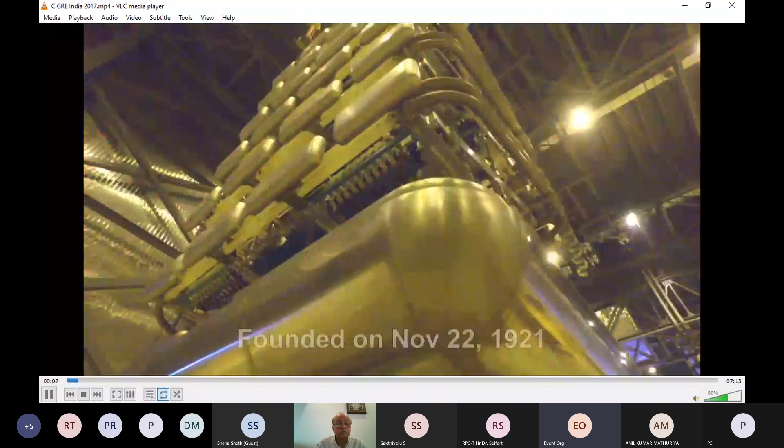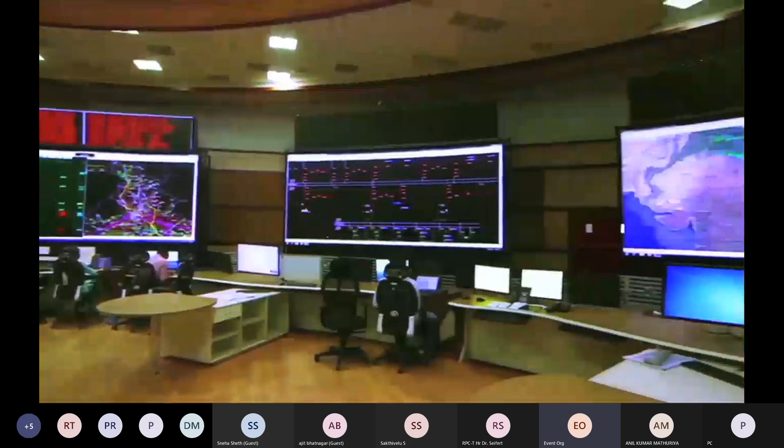CIGRE, the International Council on Large Electrical Systems, is the world forum for power systems, founded on November 22, 1921 at Paris. CIGRE deals with the issues related to the development, operation and management of electric power systems as well as design, construction, and maintenance of equipment and plants. Mission of CIGRE: to bring together experts from all around the world by sharing knowledge and joining forces to improve the electric power systems of today and tomorrow.

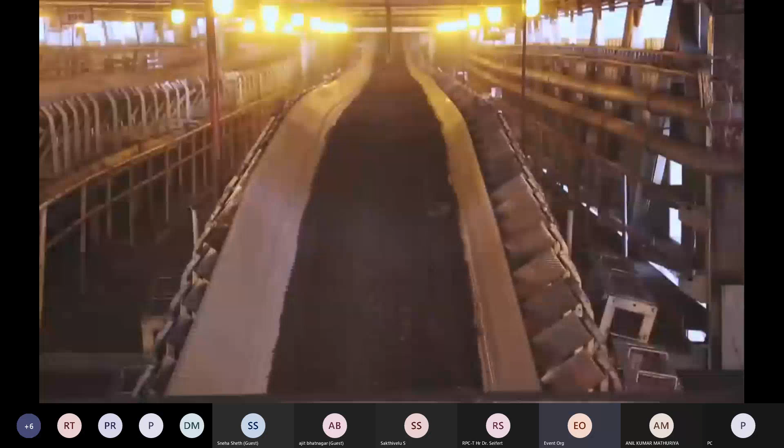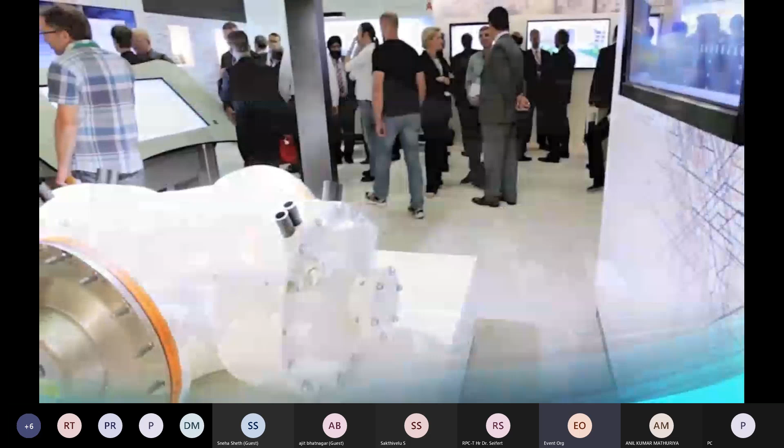It mainly aims at coordination of research, exchange of experience, and scientific and technical information on the operation and design of electric power systems. CIGRE is an association that promotes the exchange of the latest generation of technical knowledge and brings innovative ideas to support industry needs. CIGRE has a worldwide network of experts from ministries, generating companies, transmission and system operators, distribution operators, regulators, manufacturers and academia. It has gained international representation in nearly 90 countries through national committees in order to provide opportunities for improvement of services supplied to society.

CIGRE has 16 study committees, 95 member countries, more than 10,000 individual members and more than 1,000 organizational members. CIGRE's strategic directions are best use of existing systems, unbiased information for all stakeholders, environment and sustainability, and future power systems. The challenges are renewable energy sources, growing environmental requirements, limitations to build new transmission infrastructures, architecture of networks, operation of existing power systems, transmission of large amounts of power over long distances, cybersecurity, and intermittency of renewable power generation.

CIGRE operates through 16 committees on different subjects having members from various countries. These committees are divided into 4 groups. Group A, Equipment, and the study committees are A1, Rotating electrical machines, A2, Transformers, A3, High voltage equipment. Group B, Technologies, and the study committees are B1, Insulated cables, B2, Overhead lines, B3, Substations, B4, HVDC and power electronics, B5, Protection and automation.

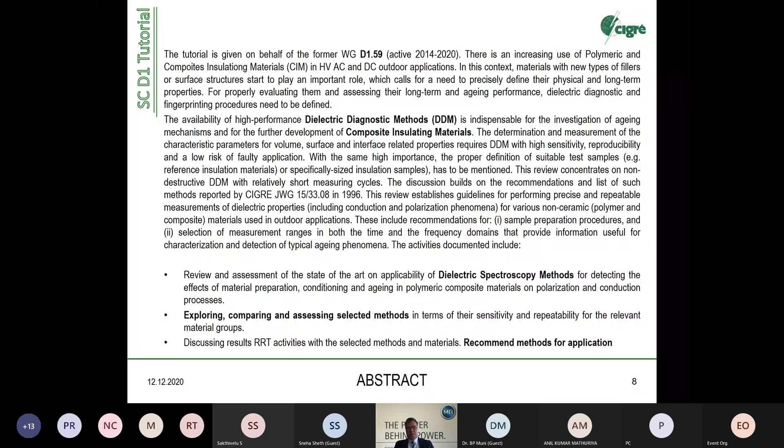So we will talk about composite insulating materials. Composite insulating materials are today considered an emerging technology. If you look into cable insulation, composite insulators, dry-type transformers, all these oil-free, SF6-free apparatus work with these composite insulating materials. And the uncertainties are here.

That's one of the main troublespots in composite insulating materials, which are interfaces. Interfaces you can have as a macroscopic interface between silicone and epoxy, or between metal and the composite material, or you can also have microscopic interfaces. Microscopic interfaces are interfaces between a matrix system and a filler, for example, a quartz powder, alumina, or glass fibers. And interfaces may be very complex.

So these are the standard ones taken for theoretical investigations. Typically you can have a normal interface or a normal directed interface. You can have a tangentially directed interface, or a mixture of both. When you think about glass fiber reinforced polymers or mineral filled polymers, you have a very diverse, wide, and complex arrangement of interfaces. But to understand which kind of interface is dominating, these three models - normal, tangential, and normal-tangential - are defined.

Going back to the actual polarization effects in solid dielectrics, this is taken from a book, from lectures of professors, of course - it's not a new invention. What we have to look at today is time starting from some microseconds to hours, months, and years. And the polarization mechanisms behind are mainly driven by space charge polarization, so ionic polarization, hopping polarization, and orientational polarization - so dipoles. That's the range we are looking into the physics when we talk about composite insulating materials.

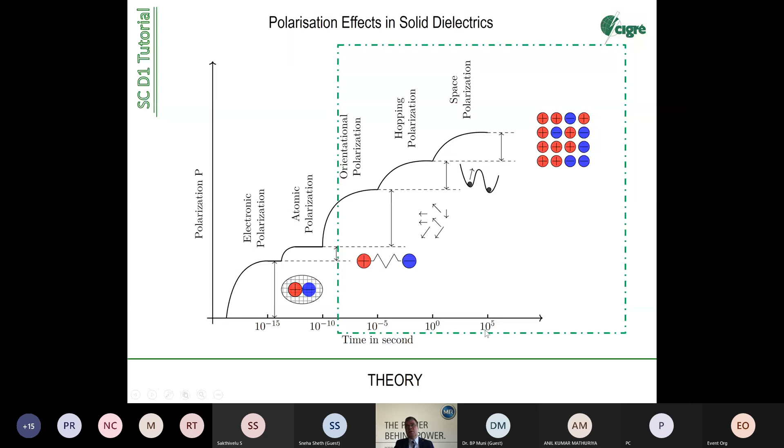For example, in this range - space charge and ionic polarization - we mainly talk about the Maxwell-Wagner effect. Maxwell-Wagner effect is a dominating effect in composite insulating materials since it acts at interfaces. So you charge or discharge space charges or ionic particles in and along interfaces. So the Maxwell-Wagner and so-called accumulator effects are the main effects we have to look into. And what we also can see here, we have to look at long times. Long times means low frequencies.

So after reviewing the available procedures and methods, we found very nice methods coming mostly from universities and from scientists, which are called time domain spectroscopy, TDS. It's a very interesting way to analyze materials. It's given here on the left side as a very simple scheme.

So you have a stimulation - normally a step voltage - and the step voltage has a response which is called current response, and this current response is given by the quality and nature of the dielectric. So normally what you do, here's the theory behind it.

So you have a polarization contribution, you have a conductive contribution - here's the polarization, here's the conduction. So normally you use a kind of Laplace or Fourier transformation, DFT, to transform this response function into a spectrum, into a frequency spectrum, and from this frequency spectrum you can see what kind of effect is in the material.

It's most probably the most effective method because it's not time consuming, it's easy to apply. What are the difficulties? Difficulties are measuring the very low currents. The currents are in the range starting from nanoamperes via picoamperes and femtoamperes. So the main challenge here is to have a noise-free, distortion-free measurement of such low currents.

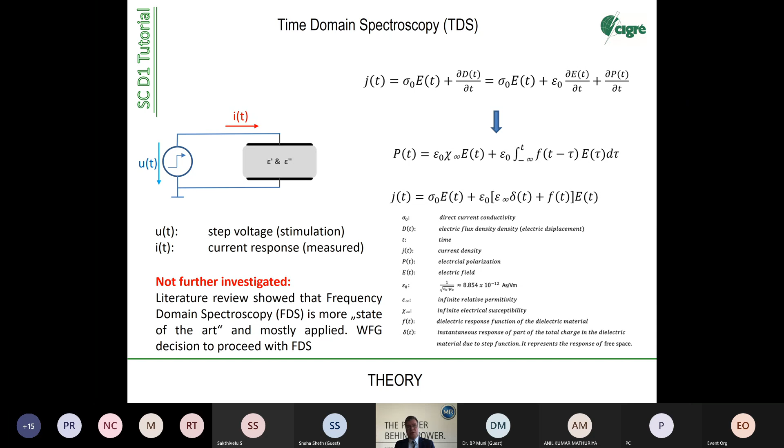This is possible in shielded arrangements, but we found it's not so good in industrial applications because the required conditions are hard to realize. It's an interesting method - you find a lot of papers in the literature review, and it's also used in transformer diagnostics, by the way. It's very close to applications, but for materials, we selected this method here.

It's a frequency domain spectroscopy, also called FDS. In FDS, you take a voltage phasor as a stimulation signal, and you get a current phasor as a measuring signal, as a response. This is a very simple arrangement. You vary the frequency normally, starting at very low frequencies in the range of some millihertz, then sweeping into the kilohertz and megahertz range, and you get this current response function, which is also divided into a capacitive part.

Let's see, a response given by the permittivity, and also a contribution given by the conductivity. So both methods consider conduction effects and polarization effects. And from this calculation, you can derive the complex permittivity, which is epsilon 0 multiplied by epsilon R1 and epsilon R2, the complex function. And in the complex function, you can distinguish between polarization and the conduction part. The conduction part is given here. Both are depending on frequency.

And so derives the tangent delta. Tangent delta is also known as loss factor. And the loss factor can also be split off in the polarization part, so it's the dipoles where you lose energy by friction, and you have also a loss by conductive mechanism. So it's a very clear and comprehensive theory behind, and it's just about the evaluation of the complex permittivity.

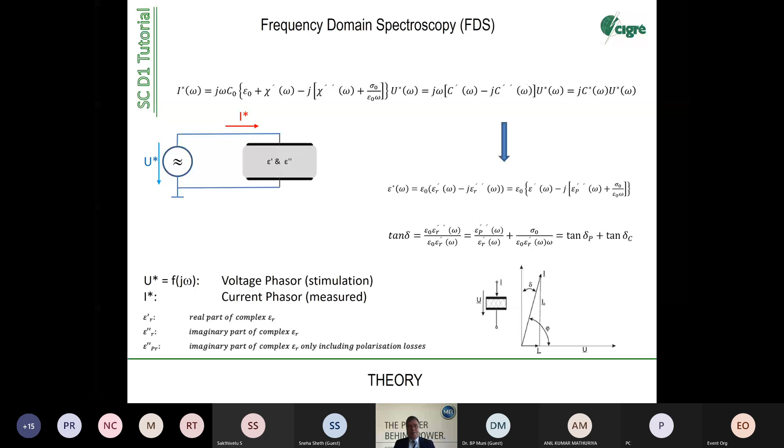So what can we do with the results? This is mainly from a very good book made by Jonscher in the UK, from Chelsea Dielectrics Group, a dielectric study group that worked in the 1970s, 1980s, which derived a lot of physical mechanisms that can happen in moisture affected or aging affected polymers and composite materials. And this is a summary of what is written in this book.

So it's a list of typical dielectric phenomena in solid dielectrics. We start with the simple ones. You know the Debye relaxation, which takes place in the high frequency range. Here's a kind of non-Debye, a mixture of many mechanisms taking part in the multi-100 megahertz area. As I mentioned before, resonances are also in the optical range. They are not important for us.

So we have to look at 4, 5, 6, 7. Number 4 is interfacial polarization taking place in the low frequency range. This is the Maxwell-Wagner effect. So this half circle or semicircle in the low frequency range is the Maxwell-Wagner effect. Number 5 is ionic conduction, which is theoretically a straight line in this diagram. This is also called a Cole-Cole plot, epsilon 2 versus epsilon 1.

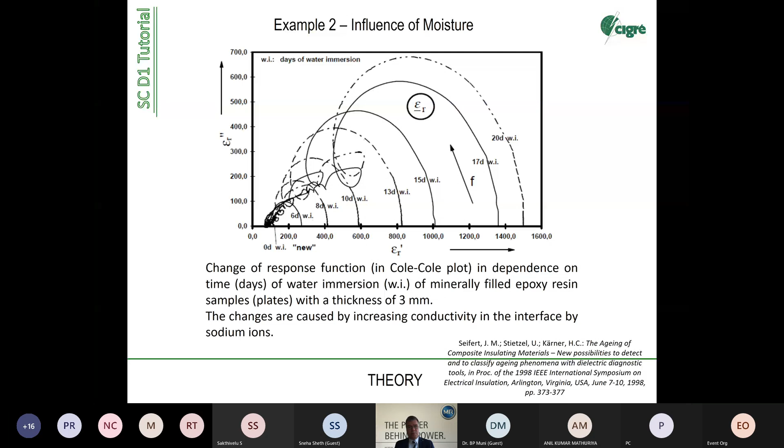And in the brochure, you have two sets of references. One is the normal one, starting from 1 to the end, and there's the E1 to E33 or 38. And the E references are for examples. So don't be confused if you read the technical brochure. This was done by intention to distinguish examples from the main literature.

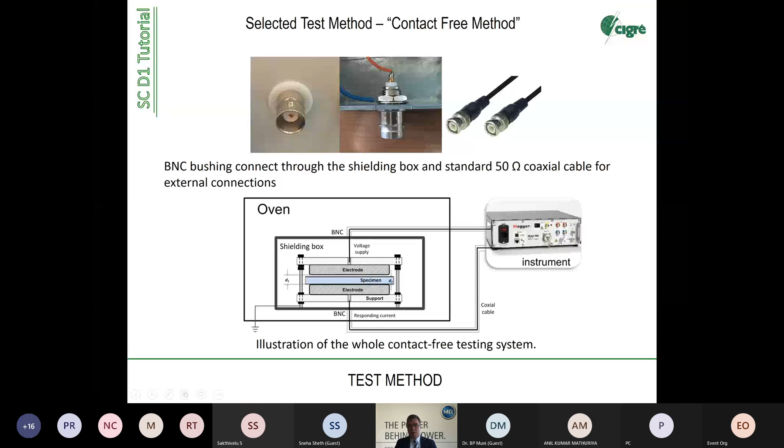Sensitivity analysis, and this was really thanks to Professor Derek Oliver from the University of Manitoba in Canada, who is one of the best experts, in my opinion, in this field. He did very theoretical work, but also assisted and supported by experimental work in the background, and he found that the spatial geometry, which is given with the delta dr, also has an impact on the accuracy of the correction factor. So if you do not do it in the right way from the beginning, and the arrangement is not fixed as it should be, then other factors are also negatively affected. It's like a chain reaction. If you do the first step wrong, then your other steps are also not very good.

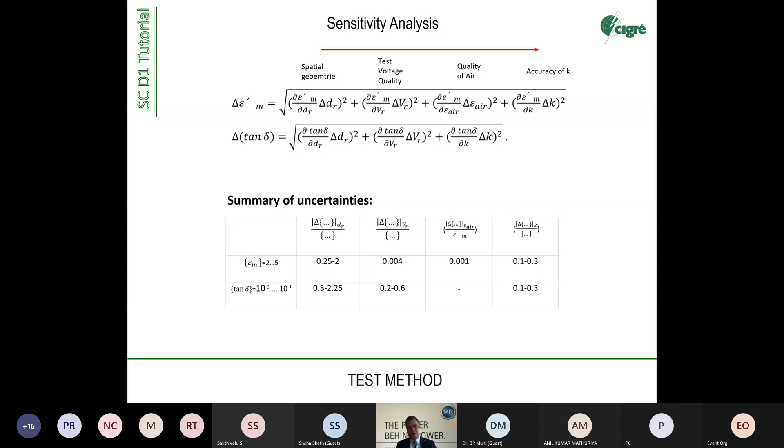I think for later practical applications, you will not measure 5 cable slides or 5 cable samples because you cannot afford to do it, or you don't have the time or the resources. So this is one thing we have to look at, and we have also recorded it in the lessons learned.

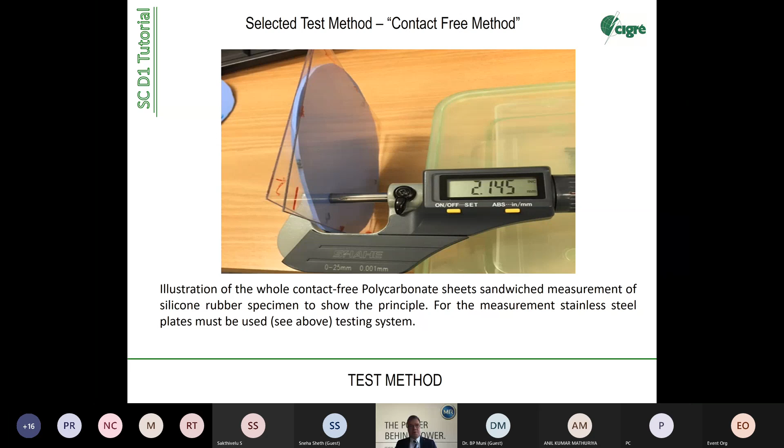Now the theoretical part is more or less finished, so now it comes to the test procedure. In the work on fingerprinting and in the tracking and erosion experiments we did in D127, it was found that we should have a really good test specification.

With the test specification and the quality of the test specification, people start to work. For example, in this working group we had 7 participants sitting in different continents. One lab is in Canada, 2 were in Germany, 1 in China, 1 in Sweden, 1 in Argentina. So you're working not in one group, but under different conditions. The temperature in Canada may differ from the one in China, or humidity conditions may differ.

This is intended. Exactly what we want to do is apply this method, or explore this method, under different conditions, done by different workers, under different control conditions. This is why we do this, because we have to develop a method that is at the end representative, repeatable, and cost affordable. We have to apply this method in an industrial way at any site we can imagine in the world where we want to get this value. This is one of the rules, the 4 rules of IEC. If they are not fulfilled, such a method will not enter the world of IEC standards.

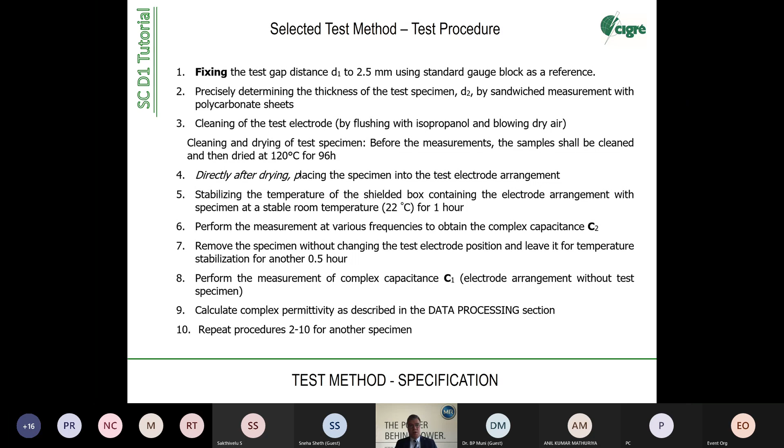Some key hints here. Do not move or adjust the electrode system after the reference measurement. For an expert it's clear, but the lessons learned were different. Fix the gap distance to 2.5 millimeters. Use a shielding box to avoid external interferences. Connect via BNC. Do not use oversized specimens.

Sometimes you say, okay, my measuring area is 100 millimeter diameter, so take a big plate and put it under the electrode. Don't do it, because it affects the factor K due to the stray field.

Determine precisely the average thickness of the specimen as well as the air gap. As I mentioned before, these are the main error modes or error contributors. Clean the specimen. Always check original capacitance data, so there's self-verification of the equipment, the self-testing you have to do.

Sometimes these electronic devices are not in a zero status. Secure proper grounding of the measurement equipment. Avoid loose contacts, because these are also potential failures.

You can maintain stable environmental conditions regarding temperature and mainly humidity during the test. Store the samples afterwards in a dry area, maybe in an oven, if you want to repeat the measurements, or if it's planned in the round robin, just to repeat it after some days.

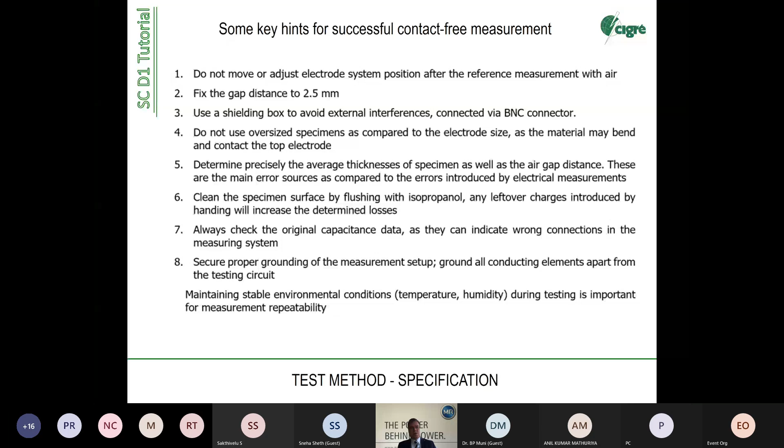Actually, this was our main scope, to work with this kind of characterization of new materials. But then we decided, by the way, we had 14 working group meetings, two per year, and the last ones were virtual. But you can imagine that if a large group of 30 people or even more sits together, there are a lot of ideas coming up, and some of these ideas are good. Sometimes we followed them up, sometimes we forgot about them, but here was a good one.

It's water immersion, because, as I mentioned before, the interfaces, the microscopic interfaces in composite insulating materials, are mainly affected by moisture. So we can trigger potential aging mechanisms with moisture. We can stress the material in an easy way, and most probably this is also the dominating aging effect that we see in real application in the field.

So we defined a procedure. What is water immersion? We dried the samples first at 120 degrees for 96 hours. With contact-free measurements, we want to measure. We use distilled or deionized water and place the test object in water for 50 days at room temperature. You can even promote the aging if you increase the temperature.

There's a rule: if you increase the temperature by 10 Kelvin, according to Arrhenius, you get double the process behind it. So if you have a diffusion effect or diffusion mechanism depending on this equation, by increasing 10 Kelvin, you double the speed of diffusion of water into the material. So you can imagine, and there's also some limit.

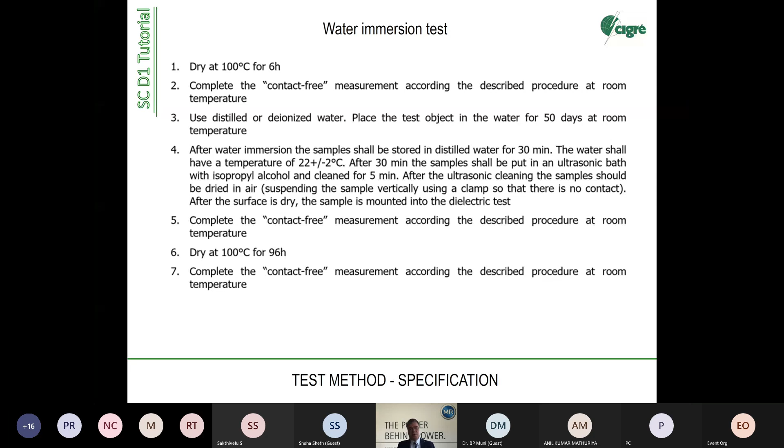Most of the people are not attending today, but these were the real workers. If you perform a round-robin test, you have to have somebody who spends the time and the money. In most cases, these were universities: University of Manitoba in Winnipeg, Canada; Chalmers University in Sweden, with Professor Gubanski, a great expert in dielectric phenomena; and Professor Kornhuber, together with Professor Bersch from Zittau, who are also deep in the field of dielectric materials and testing.

German Salvo from Argentina, from Edenor, whose company works in diagnosis of equipment mainly, also in other materials. You see the Technical University of Munich, Professor Kindersberger and his team. He's also retired now; at that time he was chairman of SC D1 and main initiator of this work.

Not everybody tested the same materials, but most tested HTV rubber, a commercial grade silicon rubber used mainly in composite insulators and cable terminations. Liquid silicon rubber covers a similar application range, going deep into cable systems. EPDM from cables and also from former insulators used as housing materials. Epoxy resins, a wide group of materials applied in medium and high voltage equipment, for internal insulation. Most of these epoxy resins are filled with a mineral filler, quartz powder, to set up the desired conditions. So this was the round-robin test.

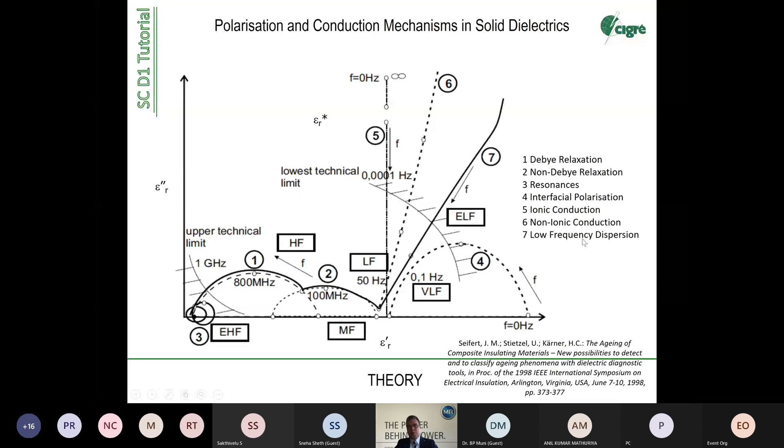So what you see in this curve is coming from here, from the lowest technical limit down to 50 Hertz or even a little bit more. So we go into kilohertz or megahertz area, but we are somewhere here in this falling branch of the so-called low frequency dispersion curve. I go back to the other one. So just to give you orientation where we are. So it fits with the theory, and we are looking to the right signal, so to the right range. Because we are searching for interfaces, we are searching for ions, for molecules that are moving, for slow moving effects.

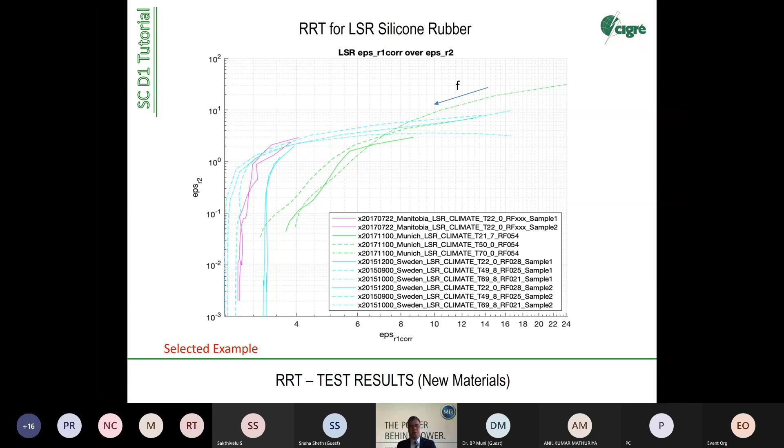So it's a pure material, more or less pure material with low amount of interfaces, actually theoretically with no internal interfaces, but also they use some kind of silica to get a mechanical property. So also these materials have some kind of interfaces, but a low amount. This material here has, by material formulation, a higher amount of internal interfaces, just given by the filler loading, which may be between 50 and 60%. 50% of the elastomer is mineral filler. You can imagine how many interfaces you have between the fillers and the polymer when you think about that these particles are in the range of 10 to 20 micrometers. So these are areas of, I think, some soccer fields that you get in a small sample.

Here, very promising at 50 Hertz, very small scatter, also with the air reference method. And in the low frequency range, you see a little bit higher scatter. But tendency is very clear here, with lower scatter than with the LSR. Why? We think, or we concluded that the interfaces give a clear signal, give a clear process behind the response, and that when this happens, then you really measure something that is really going on. So it's not determined by scatter, it's more determined by a real physical process. Same here. It's the loss part, the imaginary part, the falling tendency. It fits perfectly with the

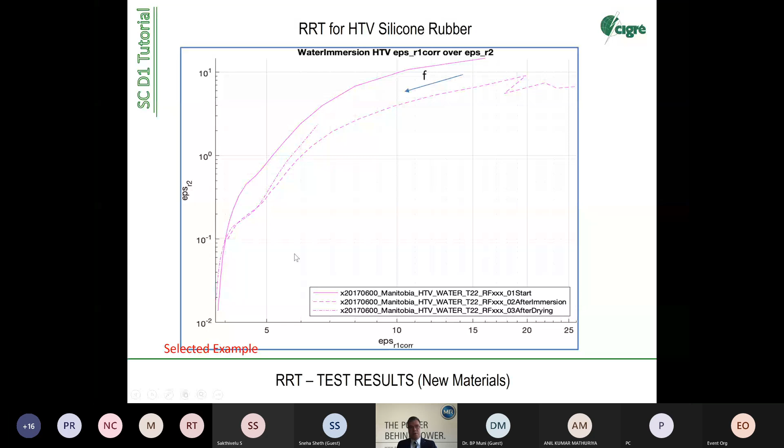Alumina hydroxide is a polar filler. It means by its nature it has a kind of polarization, and of course you have the contribution to the interfaces. Also, alumina hydroxide is not only alumina hydroxide, it contains a lot of water by nature, not only from water immersion or water penetration from outside, but if you manufacture this material, you have a certain amount of bonded water inside.

This is by intention because this filler is used as a fire extinguisher or to set up the tracking and erosion performance. Tracking and erosion performance is actually like extinguishing fire, extinguishing the arc. So you're using the same philosophy to get good tracking and erosion resistance as making a material non-inflammable.

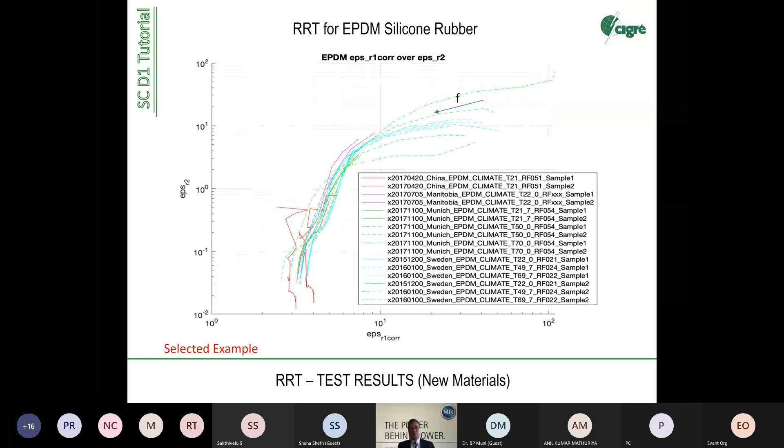Mineral filled epoxy resin, that's what I showed you before, these pictures here. These were the same kinds of materials. So you see one material, because of the interfaces, may be susceptible to electrical overstress. And electrical overstress means treeing, means step-by-step carbonization and growth of channels that may lead to failure after time, so aging time.

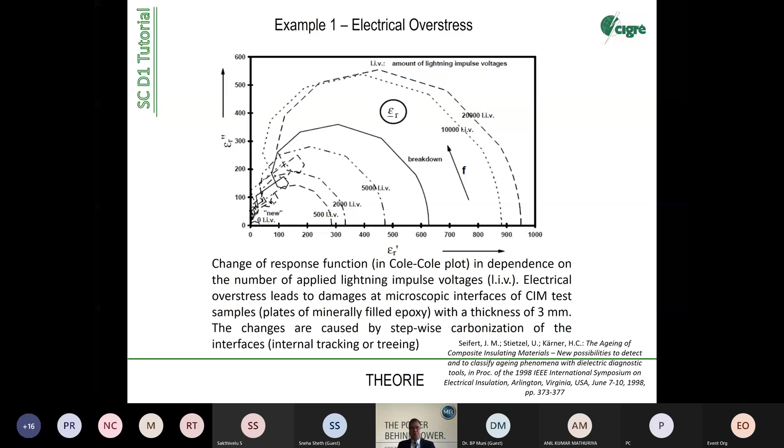This relates also to the inverse power law. You can load the material and it will not show any kind of aging until you exceed the so-called damage limit. Damage limit theory also applies for materials. If you always stay underneath the damage limit, so the voltage stress or the water stress is lower than the damage limit, you don't see any aging. Same here, that's the curve we have to look at, and the round-robin test.

Potassium is not so critical because it's not fast moving, but the speed of ions is higher with sodium. So you have to take care that your fillers have low sodium content. Secondly, the fillers must be treated with silane at the surface. Silanization and alkaline content make a good filler for a good composite material. The same applies for glass fiber reinforced materials, and for all kinds of mineral filled materials. It's also a lesson learned here, so the quality of materials can be checked with these methods in a very good way.

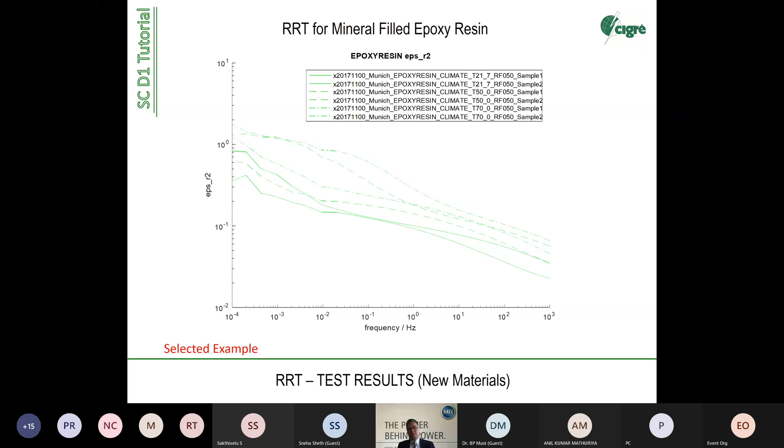The imaginary part also in a low range with a relatively flat response compared to the others speaks for the same feature, good quality material. You see again the Arrhenius characteristic when the temperature is changed. But you still see a response, you still see the Maxwell-Wagner effect is active. This can also be confirmed here.

But with all the data, what do you do at the end? You need not an expert to look into such diagrams and decide whether it's good or bad or what you see from it. In the theory for later applications, we have to bring this to a figure, to a quantitative figure, so that we can say okay, here we see a kind of effect, or we see this kind of effect, or we see no effect.

For this reason, we applied the theory of low frequency dispersion. Why low frequency? Because in the low frequency range we see the Maxwell-Wagner effect. We see all effects that are interesting and important for composite insulating materials. Why this kind of dispersion, why don't we use Maxwell-Wagner? Because Maxwell-Wagner is not sufficient to describe what's really going on in the material.

So we selected a model from Jonscher, number 13. Very good to read if somebody has an interest to go deeper into this very interesting field of physics. Read this book and you will find a lot of URLs inside.

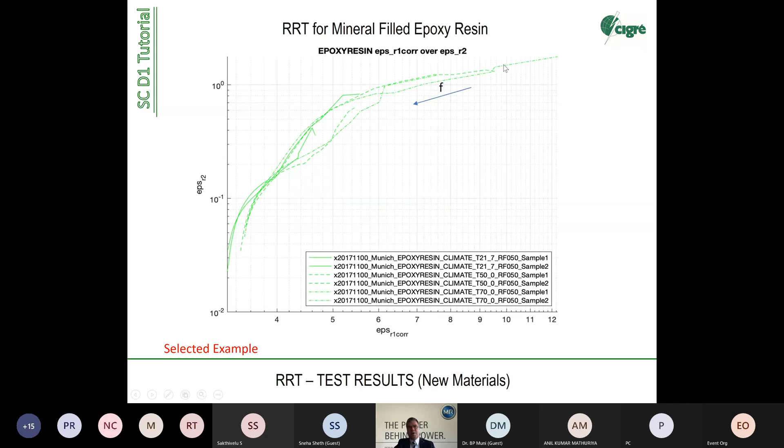And this N you have to see. N is actually, you have to make a straight line here, extrapolation. Also, your software is doing this, so you have to determine the angle of the slope, and from this angle, from this arctangent, you determine n from these values in the logarithmic figure. Stefan has done this by means of self-made computer software in order to have all diagrams under the same observation and under the same evaluation.

And in literature, you find the following values. So normally I explain how you do it. You take this slope. From the slope, you get the angle. From the angle, with the cosine function, you get n. With N, you can look into Jonscher's theory. For example, if you see an N of 0.8, you have a dipolar response. If you see two modes, like here, then we have a dipolar response, and the lower one is a conductive response. So it's a mixture of two. So you can filter out different modes of polarization and conduction.

This is also lessons learned. So we need a software like an expert system to detect what's in your materials. That's for the next group, for the continuation of this work. We need an automatic device that gets these N values out of the plot. And this is also given to the big suppliers of equipment like Megger, or I don't know what the names are. They are the companies that supply such test equipment. They could have a software enhancement to get a module for dielectric diagnostics. This is very important for later studies on real applications, because you cannot hire a scientist any time in a utility when you want to do a cable diagnostic or transformer diagnostic. So you need equipment that has already implemented this kind of evaluation.

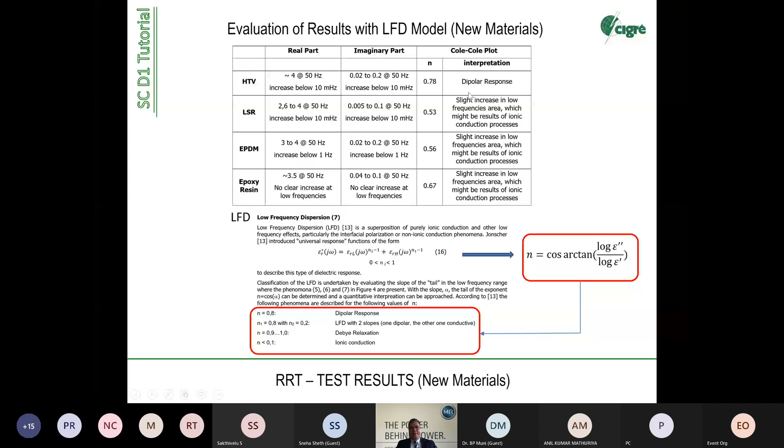Of course, this is for new materials. The whole thing becomes more interesting when you do water immersion or other aging effects. This is a test that was done additionally. It was not in the plan, but we said, okay, we want to simulate aging. We want to challenge the material, to stress the material, and we selected water immersion as an aging mechanism for this group of materials. So you see here we go into the details. For these epoxy resins, by intention, we used a bad filler. It's a bisphenol A based epoxy, the state of the art, but we used a filler that is not surface treated.

And we used in this case as a reference a good material with a good filler, with epoxy silane treat. And FRP material we used as also to look into it. Specification for water immersion, I repeat it again. We have to define the way we want to store. We want to have the initial conditions. So what do we do before the storing, and how do we handle it during the procedure?

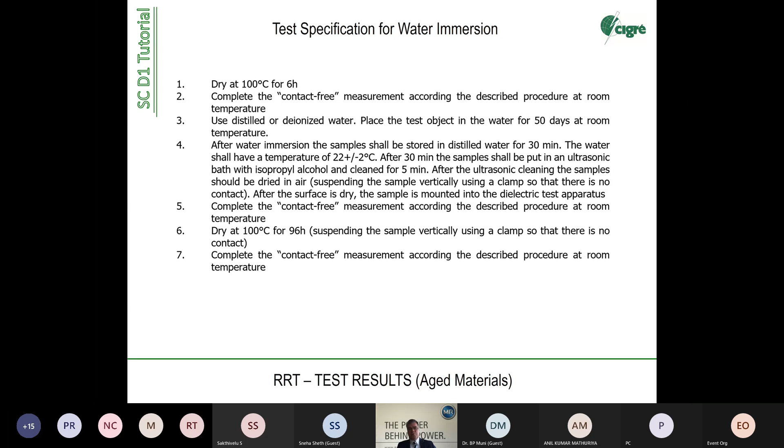So we are not fully at the target. So we need to do more. So the group needs to do more. In my opinion, it's easier to work on an application because your capacity and the material input is much higher. So the likelihood to have a disturbance on a bigger volume is lower than disturbing a small test sample. It's only my idea, but we can discuss later.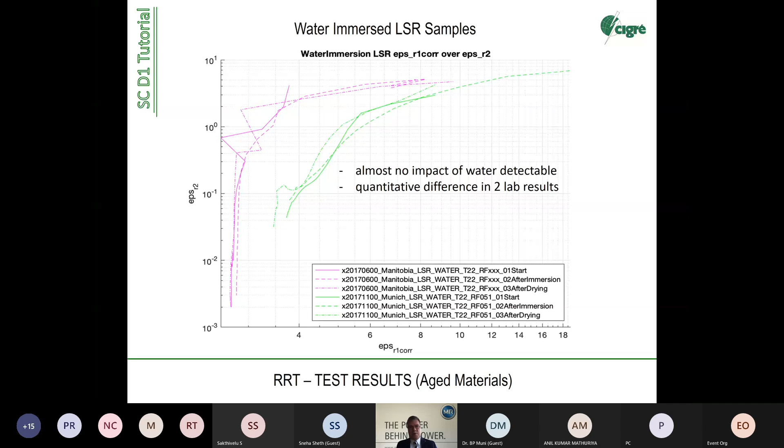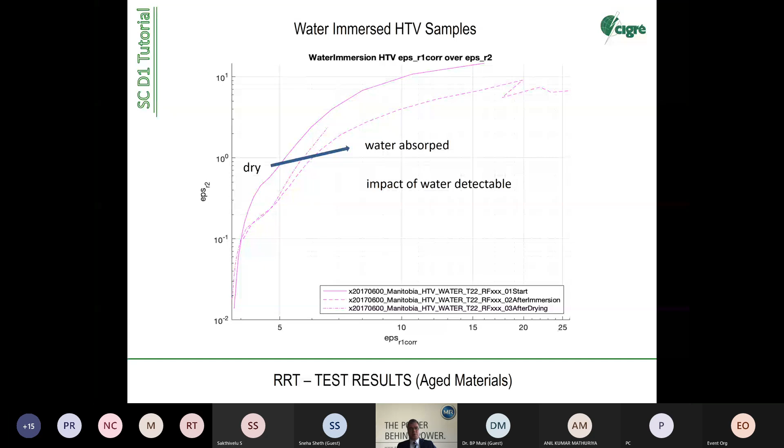Here it's a HTV sample. Keep in mind, mineral filled, alumina trihydroxide, 50% by weight. So we see a clear tendency here from the dry response to the water absorbed response, and you can say it's clearly impact of water is detectable. Not a surprise here because besides the polymer matrix, the filler is the same. We see impact of water also here.

It's affecting both. It's affecting the loss situation because you dissolve alkaline sodium ions. They are still in minerals. You never get them out completely. And of course, you have water at the interfaces. Water itself has an epsilon R of 81. So any kind of water in this interface will increase both epsilon 1 and epsilon 2.

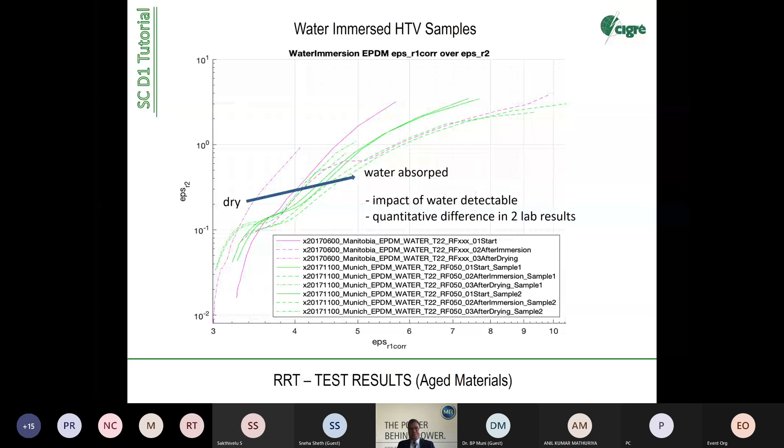Here's a HTV samples. Sorry, that's wrong. It's a wrong headline. I will correct this later on. I will send you also this presentation as a PDF, but I have to make some corrections first. Here, forget about HTV samples. It's an epoxy W12, which means no surface treatment. It should actually have a bad quality.

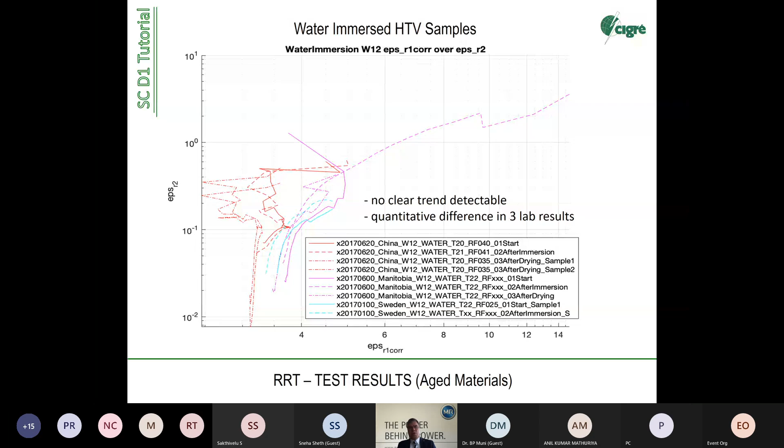What happens if we test only at one laboratory? So how is the difference with different materials at one lab? So that was this question here. So in Manitoba, Canada, they performed the test on LSR, HTV, and EPDM, and you can see they differ. Both materials are not in the same area or on the same line. So they are different in initial conditions, but they show the same tendency. And also here you can detect moisture in each material.

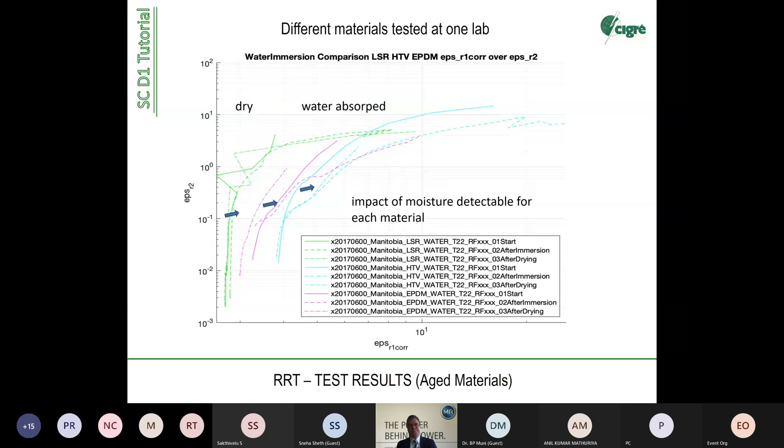Here we have studied different filler surface treatments. And here now I'm on the right way. Strong impact on W12, so no surface treatment. You see big move from initial conditions to water immersed conditions. And you have a minor impact on the surface treated quartz filler in epoxy. So that's very clear, which means we can detect quality of interfaces, of microscopic interfaces. We can distinguish between good and bad materials.

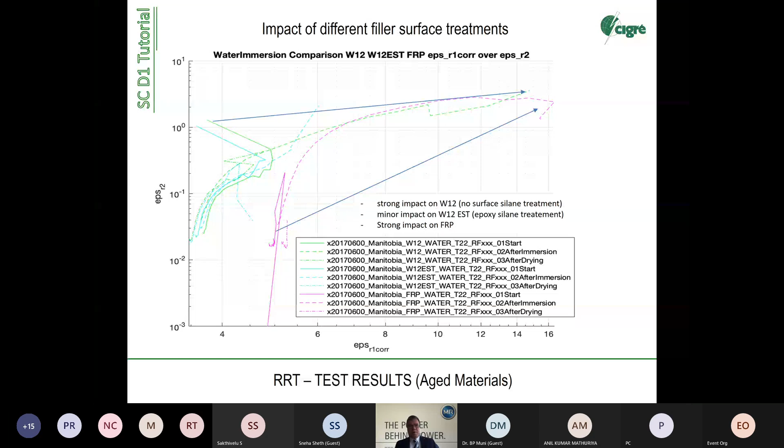Elastomeric materials. So this is an evaluation with an N mechanism or N procedure. So we see in most cases dipolar response in the dry conditions. And we see a start of ionic conductions. Lowering the N value means we are going into ionic conductions. We are dissolving alkaline ions and we are reducing N. It's also good confirmation here with the LSR stays the same. It's not changing because there are less alkaline ions inside. So the conclusion here is overall the EPDM and LSR show similar behavior during the water immersion. The HTV is much more sensitive to water immersion.

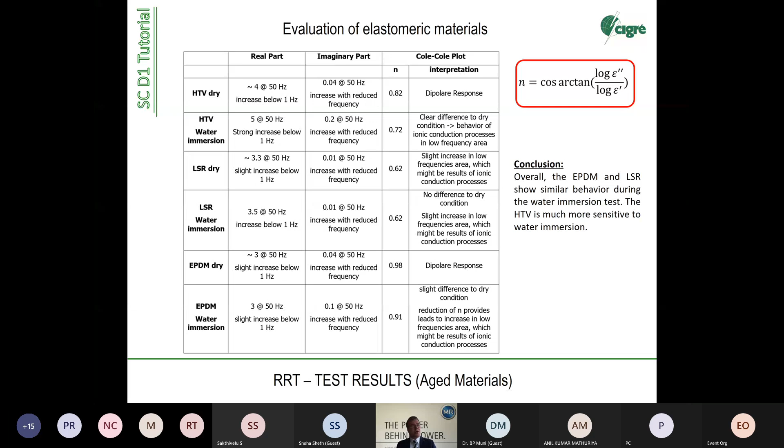Here we studied fiber reinforced and structural materials just by interest. It was not in the scope because the material itself was not defined here, but we have taken typical materials that are used in high voltage power apparatus because we do not want to study a material that has no value for the industry. So most of these materials show clear Debye response, dipolar response, with N close to 1.

And also we see the impact of water. FRP, water immersed, is lowering N, which means we are starting a conduction process. So we can see very well here with the N evaluation whether we are becoming more conductive inside or whether we're starting a more ionic conduction process. Ionic conduction, by the way, in most electrical materials is the starting point for compromising or lowering the electrical strength,

because when we talk about thermal initiated breakdown, which is one of the long-term breakdowns, it's driven by a self-accelerating loop. Losses are increasing during stress, losses are increasing with temperature, and so on. Temperature is increasing, so we have materials running into thermal-electrical breakdown, and this could be a warning sign. Lowering N increases the risk of entering a thermal breakdown.

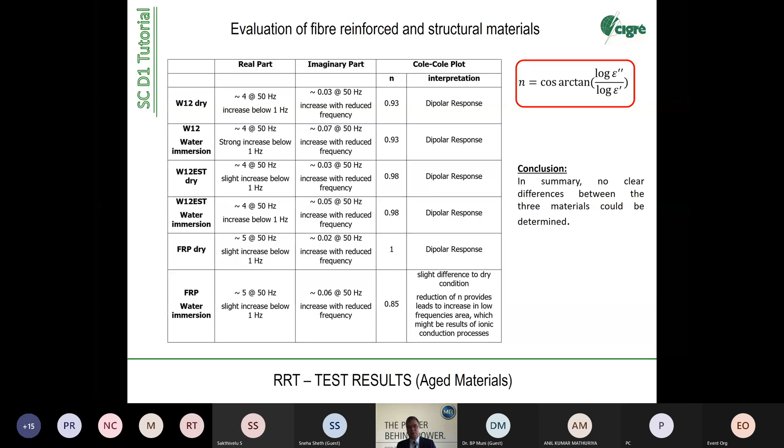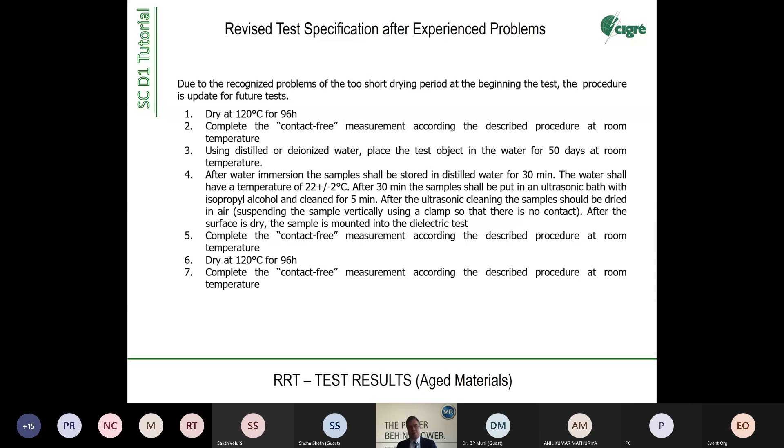Then afterwards, that's also a loop you have to do in a round-robin test. Sometimes painful, but it's necessary. So we have to make a review of the test specification. This normally you do with the experts who really have gained experience. So Stefan did this in a separate review meeting, not with the whole group, but just with the people who contributed and made the test. So we came to a better test specification here.

Then finally, we did another one because at that time, maybe you can remember five or six years ago, there was a big rush and hype regarding acid attack on polymeric materials, which occurred under certain conditions. And some people in the working group tried to steer the scope in this direction because it was very present at the time and was feared as a big hazard to the industry. So for this reason, we said, okay, let's try how we can detect such acid attacks.

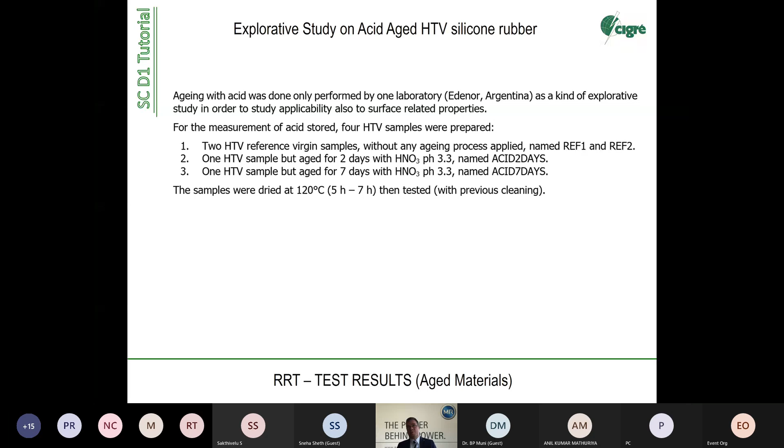Acid attack is mainly on the surface, by the way. When we look into acid attack on polymers, the depth is some 100 micrometers, and then it stops because it's a self-protecting layer. But okay, let's have a look at the results. Acid aging here. Yes, you see responses, but you see no clear effect of the acid because the acid stays at the surface. And the methods that we have defined are methods for the bulk material, for the volume. So the answer is very easy. We cannot detect surface-related aging effects with such a method. We need to look into bulk materials.

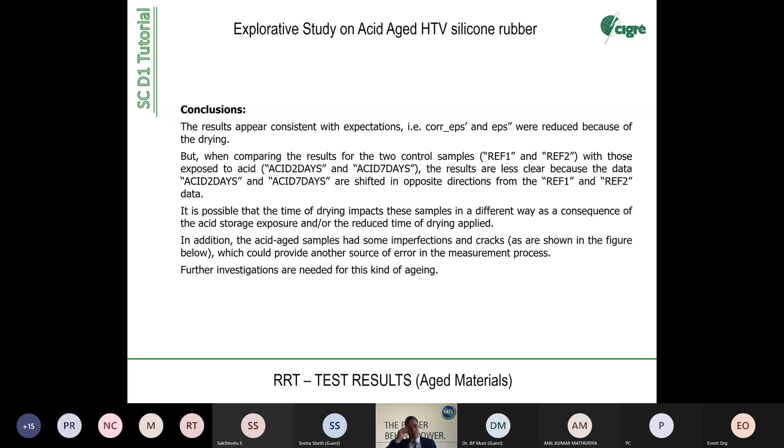Now a little bit over time, but I think I come now to the conclusions and recommendations. The aim of the work was to define methods for dielectric diagnosis and to perform round-robin tests on new initial materials and aged materials. Also, we were ordered to get a good literature review of everything that was published in IEEE, CIGRE, and all other scientific papers. We did this, it's documented, all the documents are available. If somebody wants to have them, the group can supply them. We have performed three round-robin tests.

The message is the test results can be compared in a qualitative way. So we can see tendencies, we can see trends. We even come to the same N values, although our absolute values are not the same. But the fingerprint in the diagram always looks the same, but it lies in different areas, in different quantitative areas. It's like a radar screen. You see, okay, it's a ship, but you do not see where it is. So the total adjustment is missing, and we do not have an answer to this right now. It's an open question why this happens.

The effect of humidity is clearly detectable. The definition of the initial conditions is crucial for comparing the results. It's also clear afterwards; at the beginning, it was not clear. Frequency range: we should work down to 0.1 millihertz, not deeper, because otherwise it's time consuming and we do not learn anymore, because the scatter in this low frequency area is going up, and it's not necessary. We can see the effect already at 0.1 millihertz. We also do not have to go further than 10 kilohertz, because the effects are disappearing. The ions are very heavy, so they do not move much in high electrical fields.

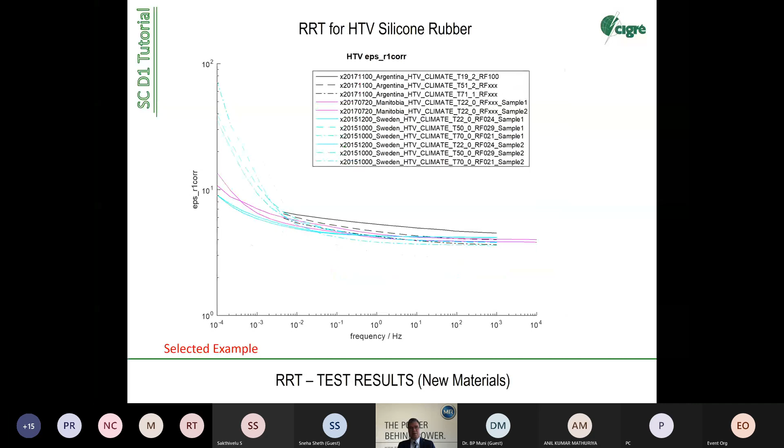So I thank you very much. This is the end of my presentation, but I want to give one slide at the end, which may also enter a lot of discussions now. I want to conclude and close the presentation with this slide. Thank you very much, and I'm happy to hear your comments and discussions.